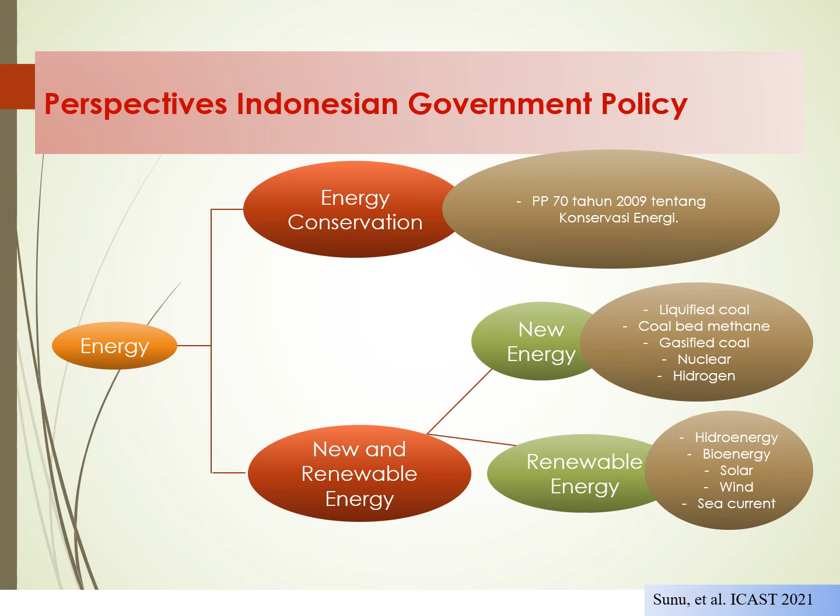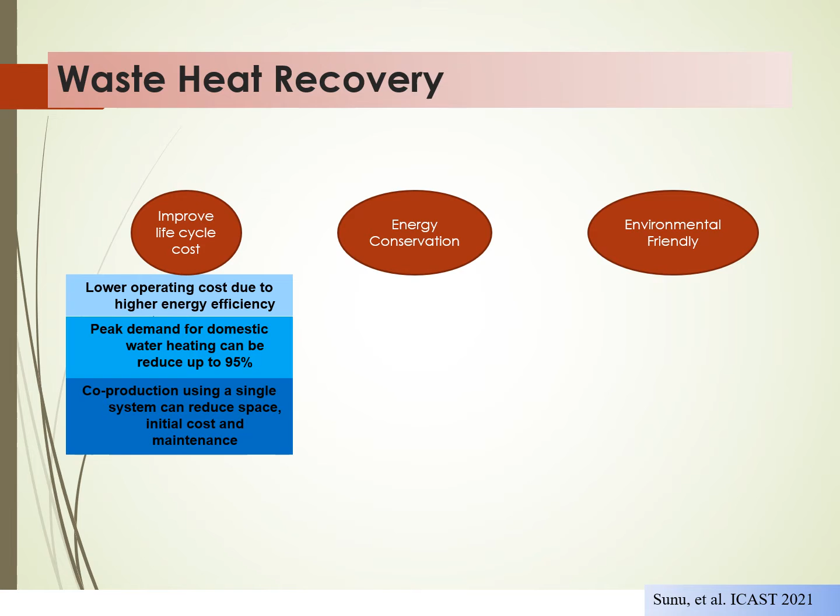Okay, let's start with waste heat recovery. The waste heat recovery can give a benefit to improve life cycle costs, such as lowering operating costs due to higher efficiency. The peak demand for domestic water heating can be reduced up to 95%, and co-production using a single system can reduce space, initial cost, and maintenance.

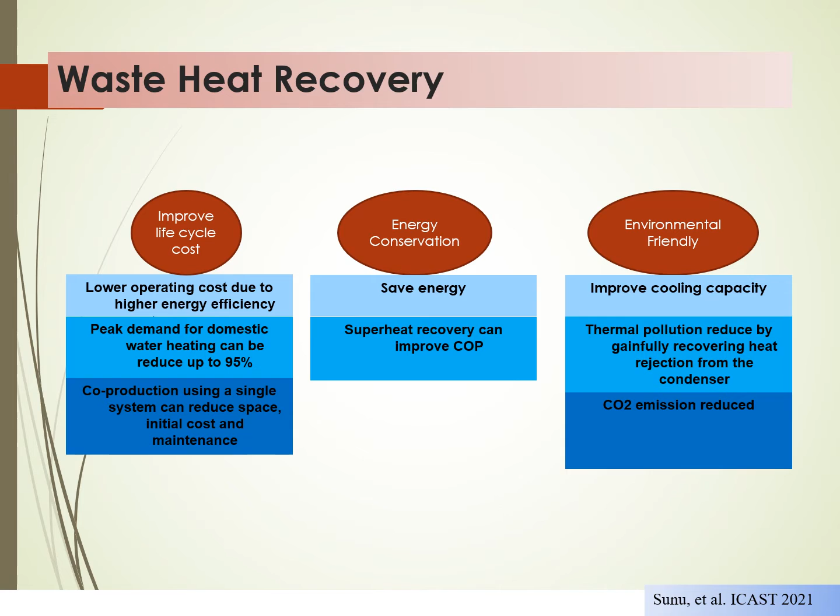In energy conservation perspective, the waste heat recovery can save energy, and superheat recovery can improve the COP. And last, for the environmental friendly, we can see the waste heat recovery that improve cooling capacity, thermal pollution reduced by recovering heat rejection from the condenser, and CO2 emission reduction.

So our experimental setup, you can see in the right figure and the left figure. The aim of the research is revealing the performance of heat recovery unit equipped by a number of twisted tapes. The experimental test rig: comprises outdoor and indoor, a shell and coil heat exchanger, and water centrifugal pump.

The nominal evaporator cooling capacity is about 9,000 BTU per hour, and the power of compressor consumption of 0.75 kilowatt. The refrigerant R22 used as a working fluid, and direct expansion evaporator as an indoor unit, comprises copper tube, and aluminum fin. Meanwhile, the outdoor units include a capillary tube, a tube and fin air-cooled condenser, and of course, the hermetic rotary compressor.

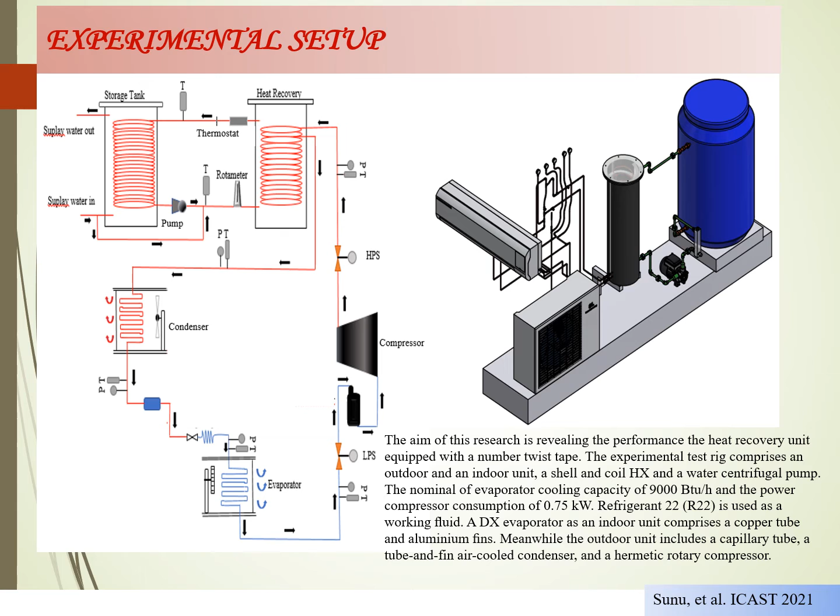Let's see the result of our experiment. In this figure, we can see the effect of the number of twisted tapes. We use 1, 2, 3, and 4 twisted tapes in the heat recovery unit. And from this figure, we can see that the heat recovery equipped with a number of twisted tapes has a temperature higher than the heat recovery without twisted tape.

Why? Of course, because the twisted tape induces the momentum transfer increase, and the turbulence in the flow will increase. So the heat transfer in the heat recovery unit also increases.

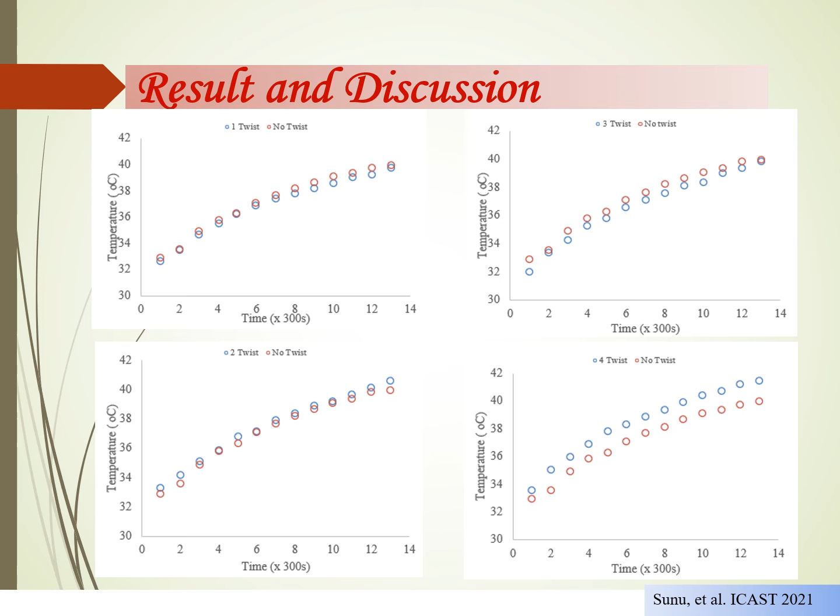Meanwhile, in the heat recovery with the twisted tape, the fluid flows from the bottom region to the upper region, from the upstream to the downstream, starting the disturbance with the presence of the twisted tape. The twisted tape induces the flow condition inside the heat recovery unit. They increase turbulence strength, recirculation regions, and of course the fluid momentum.

It is noted that the heat recovery equipped by four twisted tapes has the highest energy absorbed. The explanation why the energy absorbed by twisted tape heat recovery is the same way with the temperature phenomena.

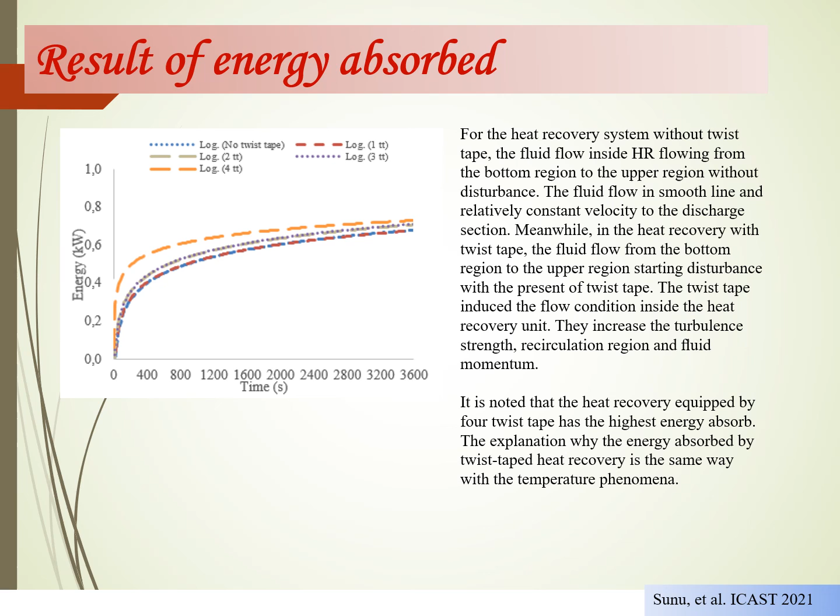Okay, let's continue so we can take a conclusion of our research. The first, it is possible to apply the proper system to increasing the temperature of heat recovery. And the second, based on the constant operation condition, the average heat absorbed is 0.56, 0.59, 0.59, and 0.65 kilowatt for the modified heat recovery.